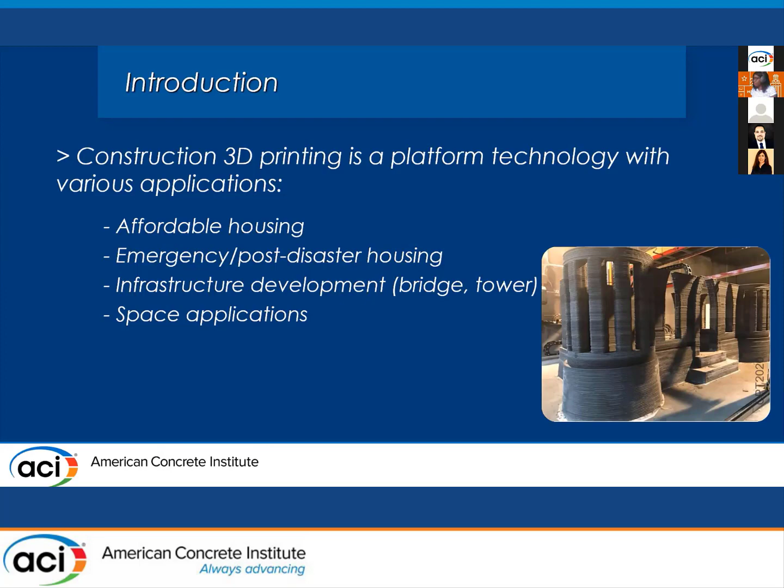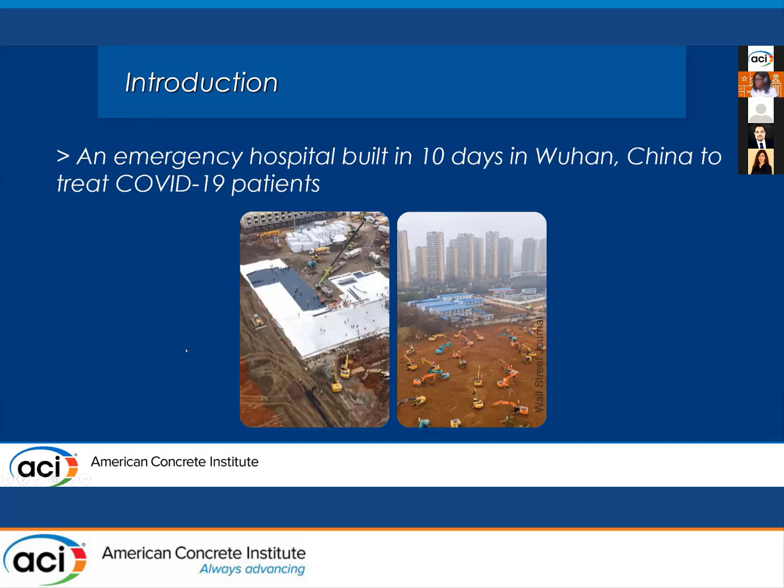And I just want to highlight the value of having an automated construction technology in these unusual times. You might have heard about the emergency hospital, which was built in China in just 10 days for coronavirus patients. So I think this would be a perfect scenario for using an automated construction technology such as construction 3D printing. So there's definitely a significant need for a fast, reliable, and efficient technology like construction 3D printing, but there are a lot of technical and regulatory challenges that have to be solved first.

Actually, later today, Dr. Mahmoud Ekenal is going to talk about AC 509 and the major advancement that we have with respect to building code compliance of 3D printed houses. But in terms of the process itself, I think robustness and quality control is a key element, which is going to determine the success of this technology.

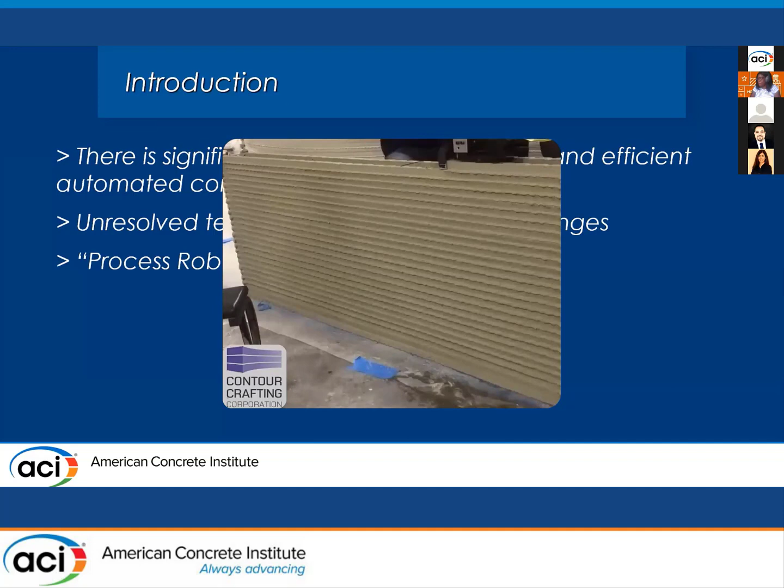I think this short video is going to help make my point. You can see a freshly printed wall, which collapses, and you can see actually me sitting right there, a few years younger, and learning a lesson from this failure. And just imagine in the middle of printing a house, like half of the height of the walls are printed, and then suddenly something like that happens. That would be a disaster in terms of waste of material and time and resources.

So that's why I think quality control is very important, and it needs to be addressed like any other fabrication process, but in construction, the product is a house, which is very big and also very important because people are going to live in these houses. So the quality of the product is very important.

In conventional construction, the on-site quality control for fresh concrete is usually simple and basic, which is okay because the requirements don't need much more. Like we are casting a large amount of fresh concrete in a short time, and as long as the structural and durability requirements are met with the hardened concrete later, we are fine. We are not concerned with fresh concrete that much.

But it's a different story when we are dealing with construction 3D printing. There are more challenging requirements in terms of fresh concrete, and that's why I think we need an integrated, reliable, real-time quality monitoring system for construction 3D printing.

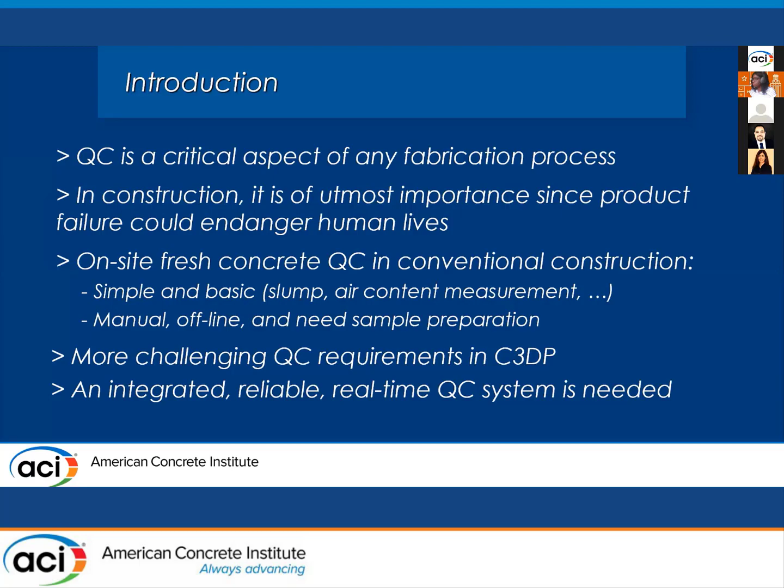And based on that, as I said, part of my PhD work was focused on developing real-time extrusion quality monitoring techniques in order to be able to detect variations in the printing material. Of course, there are other aspects like failure in the hardware components, the software and everything, but my work was focused on material variations. And the idea was to implement these ideas and evaluate each of them under simplified laboratory conditions. And you can see the 4 techniques which I designed and studied in my work.

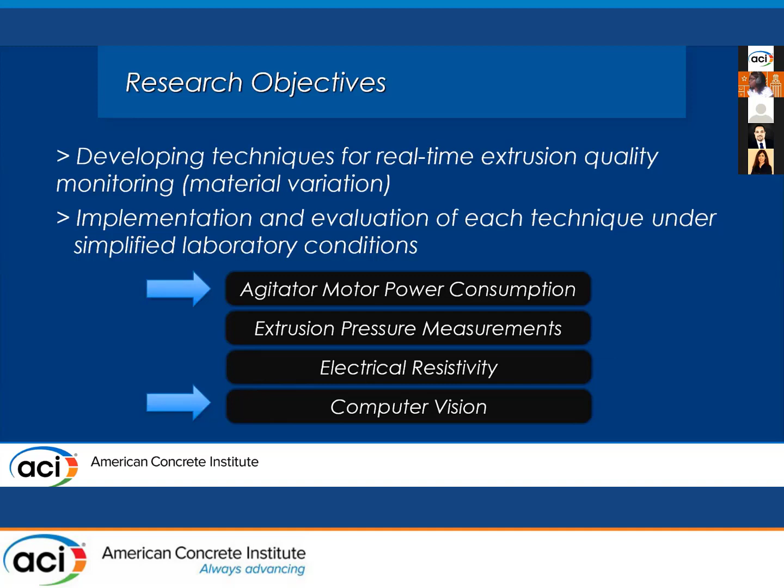But today, because of the limited time that we have, I'm gonna go through 2 of them: the power consumption measurements for the agitator motor, and also using computer vision for real-time extrusion quality monitoring.

In terms of material variations, I think one of the most common issues is the variations that we have in the free water of the printing material. In conventional construction, we also have this problem because the accurate measurement of the moisture content in the aggregates, especially sand, is not really easy. So based on that, I selected that as the source of variation, and then I designed 6 levels of variations that you can see in the table.

I have a reference mixture, I called it QC ref, and that was basically from a previous study that I did in 2017 with respect to performance-based testing of fresh concrete in construction 3D printing. And then I intentionally changed the amount of free water in this mixture by plus minus 5, 10, and 15 liters of water per cubic meter of concrete.

And I should say plus minus 10 is usually the number that is used for variations that we have in conventional construction. For example, for self-compacting concrete, we usually use plus minus 10 as the amount of variation that we should be able to deal with. So I added 5 and 15 so that I can have a good idea of the performance of each technique against different levels of variation.

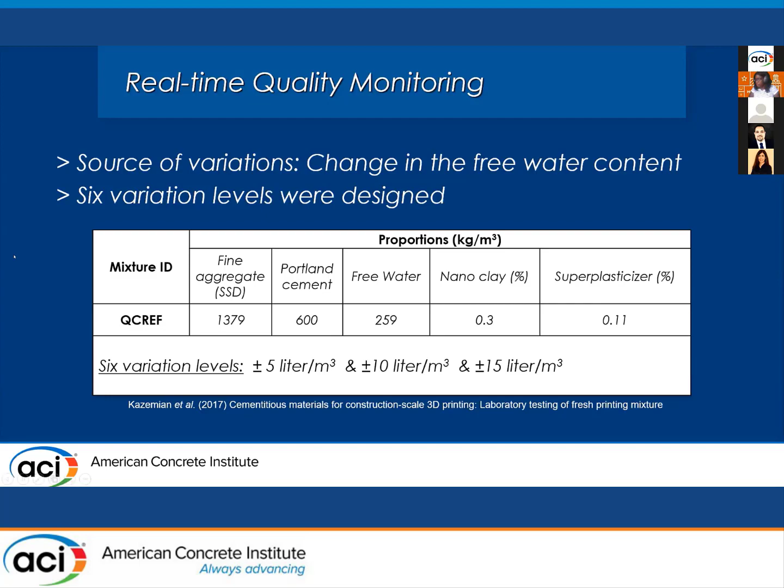As I said, the first technique is based on the continuous power consumption measurements of the agitator motor. And this idea can be described as embedding an inline viscometer or torque meter in the wet material circuit flow. And at least when I started, there was no other data or implementation of this technique. But in other areas of concrete technology, something similar was done.

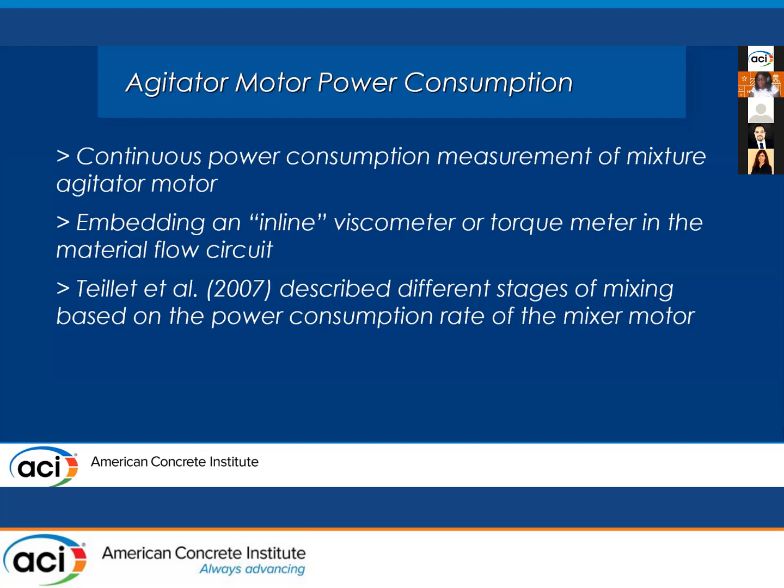Like in 2007, in a study, a researcher basically measured the power consumption rate of the concrete mixer motor and used that to describe various stages of concrete mixing and develop a graph like what you can see here to have the power consumption evolution basically at different stages.

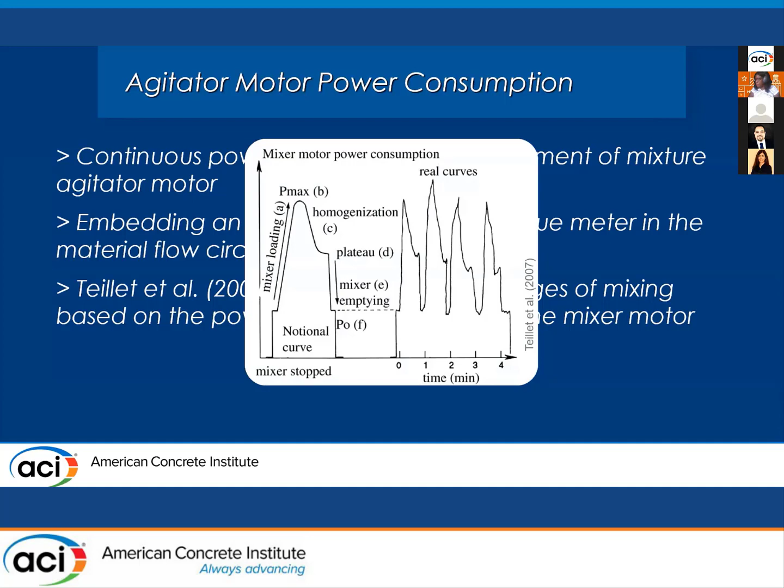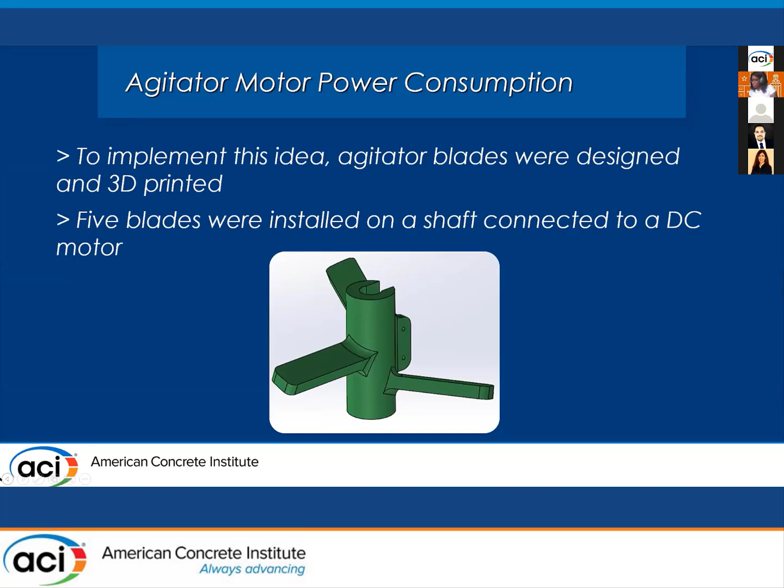So here to implement this idea for construction 3D printing, I designed agitator blades and 3D printed them using ABS plastic. And as you can see, the design was basically inspired by those commercial continuous mixers, the blades that they have. But the functionality is really more like the paddles of a viscometer that you might have seen in the lab. And I installed 5 of these blades on a shaft connected to a DC motor.

And for each test, I used the average of the readings during a 10-second period, and I repeated the experiment for each of those variation levels 4 times, and I used the average as the result of that test for a specific variation level. Here you can see the results.

The standard deviation was in the range of 1.6 to 4.4 watts, and as you can see, as a general trend, as the amount of water in the mixture was increased, the power consumption of the motor was going down, which makes sense because the viscosity of the printing material goes down by increasing the water content.

And other than that general trend, you can see that in the range of -5 to +10 liter per cubic meter, we cannot really see any statistically meaningful change in the extruder power consumption. So basically this technique is not able to differentiate between these 4 levels of water content in the printing material.

And also another observation that I had was that in the lower level of water content, like -10 and -15, we had a bigger change in the power consumption. So basically there was more response in the power consumption when we had more viscous printing material compared to like +10 and +15 liter per cubic meter.

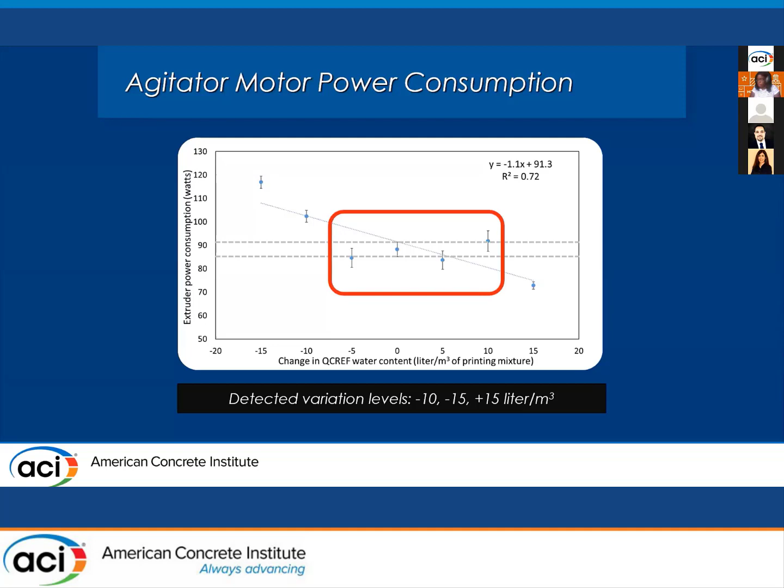So the system was more responsive when we have lower amount of water and more viscous mixtures in the hopper agitator system. And based on that, the variation levels that basically were detected by this technique were -10, -15, and +15 liter per cubic meter.

The second technique was using computer vision, which you might be familiar with. It is used as a tool for, for example, automated construction monitoring, for tracking construction machinery and materials on the construction sites.

And here the idea was based on the observation that changes in the properties of the printing material result in overextrusion or underextrusion conditions. So for example, at a fixed printing speed, reducing the viscosity of the material can result in a wider layer and basically overextrusion. And based on that, we wanted to have a vision system which is able to measure the width of the layer in real time to detect material variations.

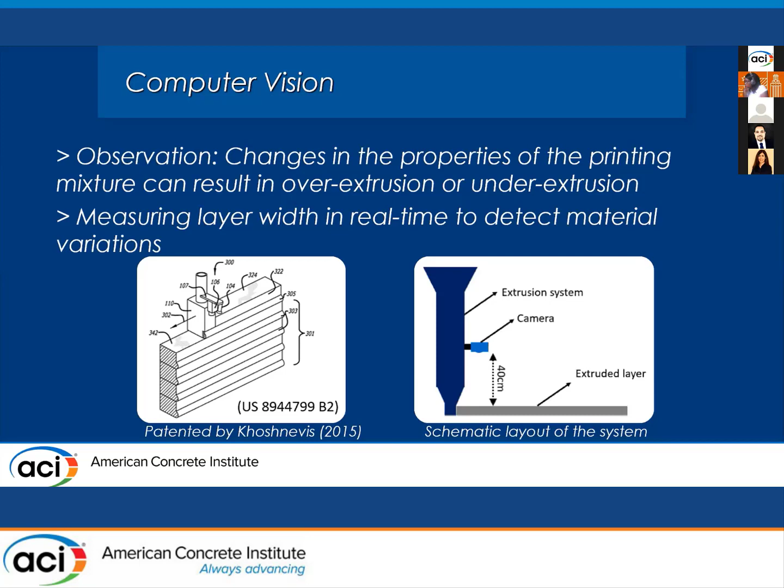And I should say that this whole idea of using computer vision during the construction 3D printing process was patented by Dr. Khoshnevis, which you can see on the left side. And then the picture on the right side shows the configuration that we designed for these experiments, having a camera at a fixed distance from the extruded layer, and then using the extrusion videos and analyzing that using a single board computer called Raspberry Pi and OpenCV library, which is a set of real-time computer vision functions developed by Intel.

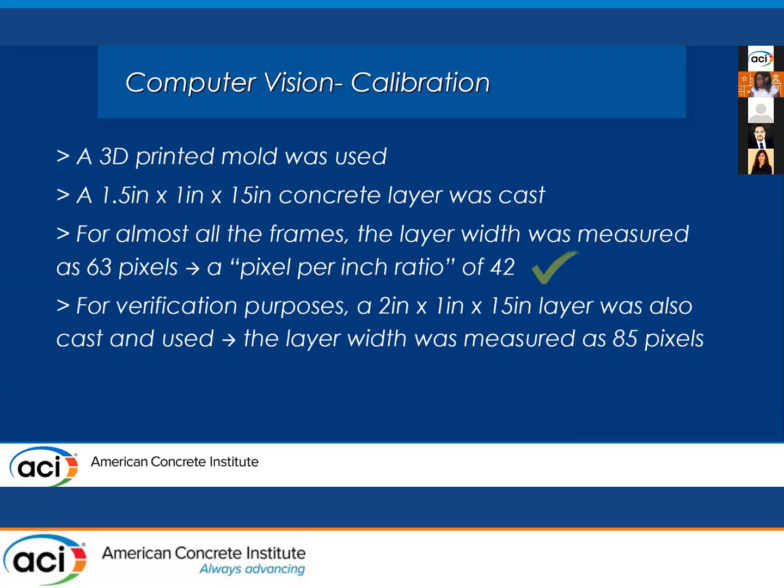And then to verify that, I created and fabricated another layer with a different width of 2 inch and used the system, and this second measurement exactly verified the pixel per inch ratio that I selected and showed the high precision of my system before the main experiment.

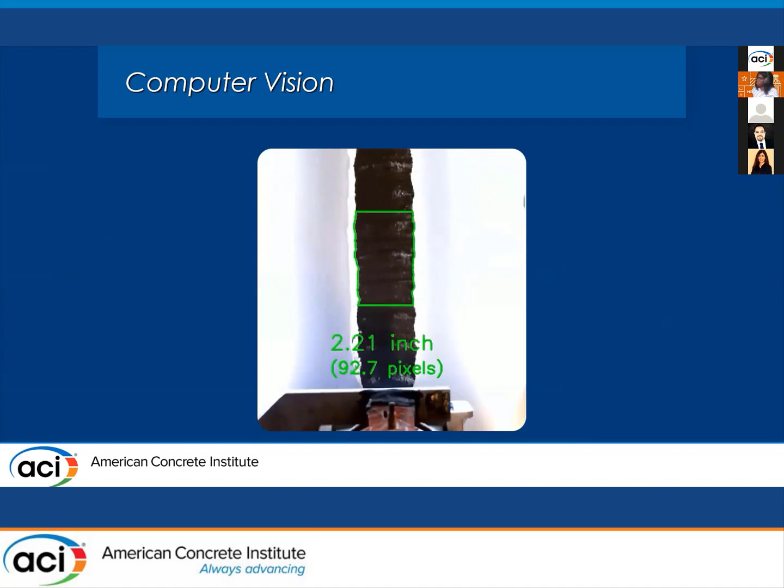And here is a demonstration of the system for a case which was actually overextrusion. So here the target width of the layer was 1.5 inch, but because of the overextrusion, the layer width was more than that. And as you can see, the system can measure that in real time and report the width of the layer.

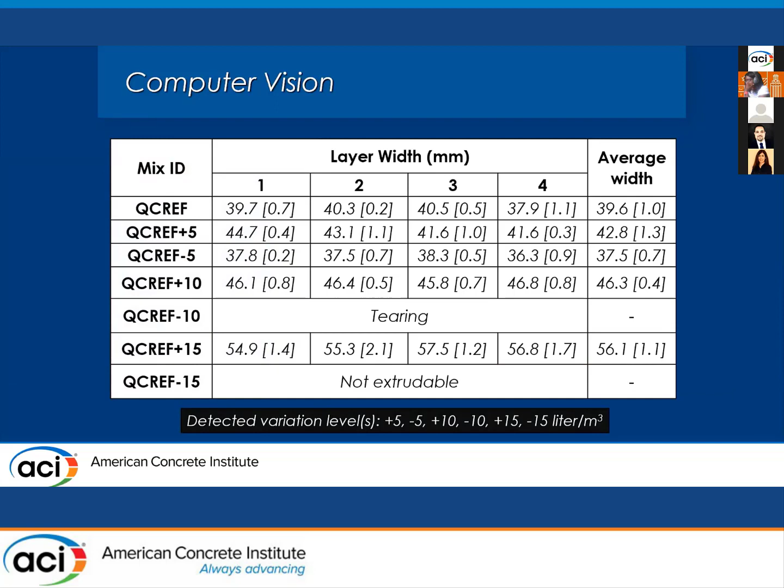And also in 2 cases, because of the low amount of water, we couldn't extrude a continuous layer. So I could see tearing or even zero deposition for those mixtures. And in those cases, the system was able to detect that as under extrusion. It couldn't differentiate between tearing or zero deposition, but it would report both of them as under extrusion. So it was detected for both cases. And we can say that for all of the 6 variation levels that I designed, the technique based on computer vision was able to detect those variation levels.

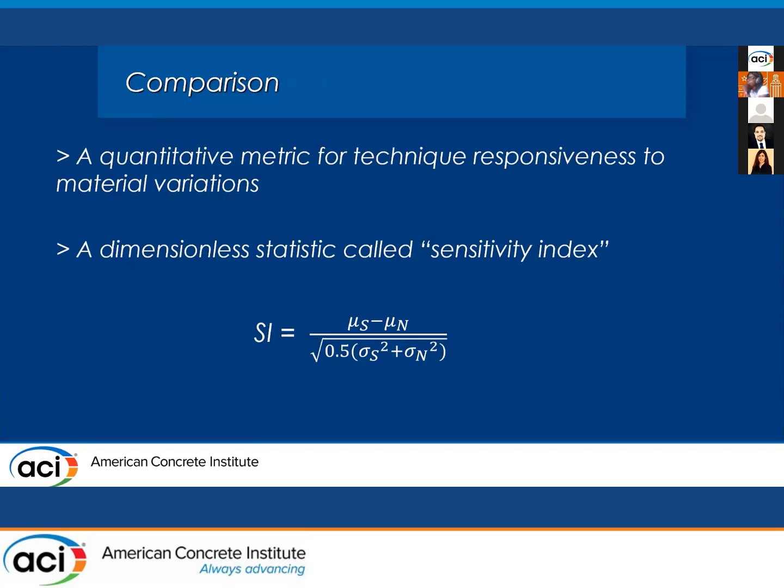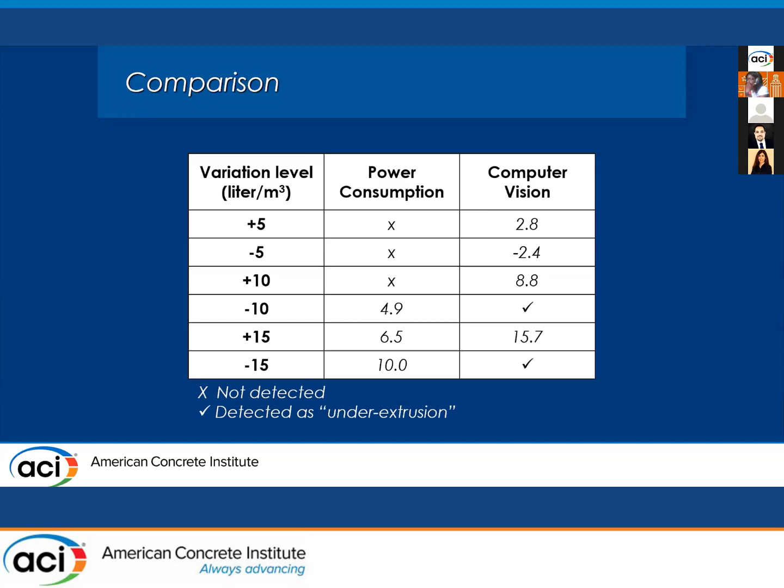And for the power consumption technique, as you can see, for 3 of the variation levels, plus minus 5 and plus 10 liter per cubic meter, it was not able to detect the variation in the printing material, but for the higher levels, it could easily detect it with very high sensitivity indexes.

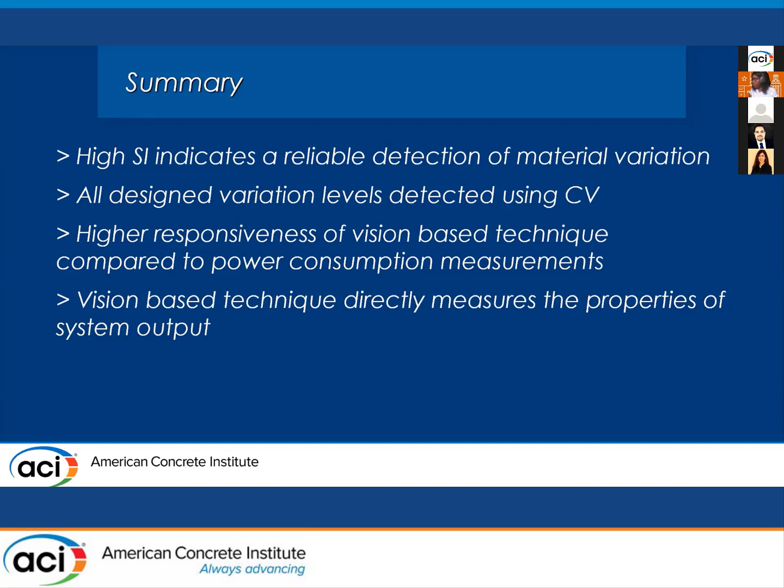So in general, I could say that the technique based on computer vision had a better performance, a high accuracy, and a very high sensitivity and responsiveness to variations in the material viscosity. And one reason that comes to my mind is that that technique is based on direct measurement of the properties of the system output rather than relying on the correlation between the viscosity of the material, for example, and printability or other properties.